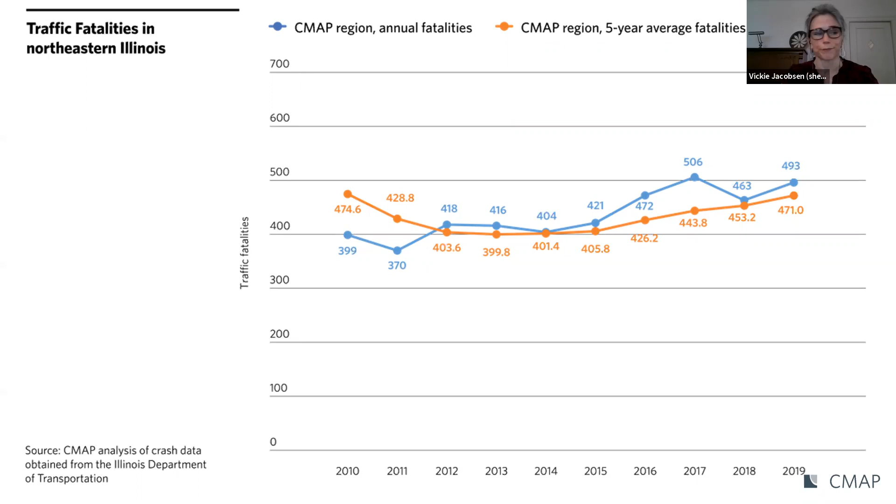In response to these alarming trends, CMAP has recently started a safety action agenda, which is a multi-year effort to develop research and programs that will help make our region safer for all types of travelers, but especially for bicyclists and pedestrians, who are sometimes called vulnerable modes, meaning they are not protected by a vehicle shell, and they are highly vulnerable to traffic safety risks, especially how fast cars are driving.

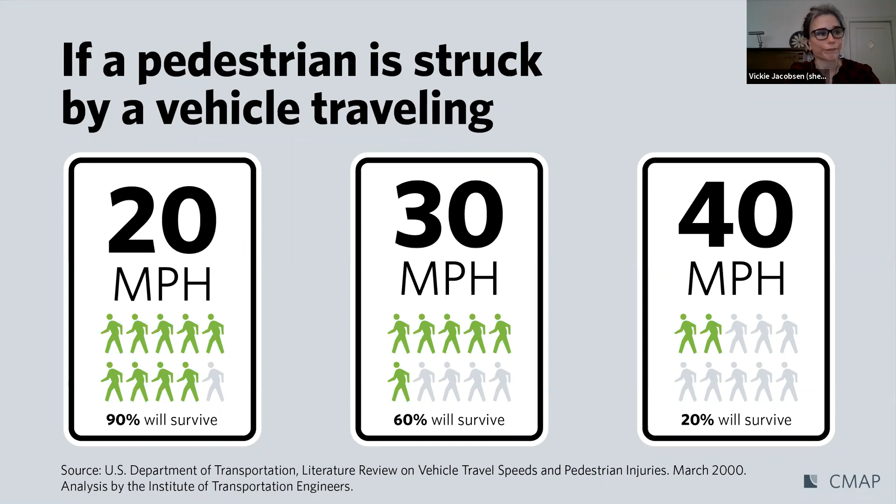As CMAP starts to think about traffic safety, there are a lot of dimensions to consider. You can see them all listed here on this graphic. These are referred to as the E's of transportation safety. You can see how broad and complex safety is. We hope to get into many of these topics in future CMAP Talks events, but today we're focusing on engineering, or design. That refers to ways in which our infrastructure and features of our street look and function to support safety.

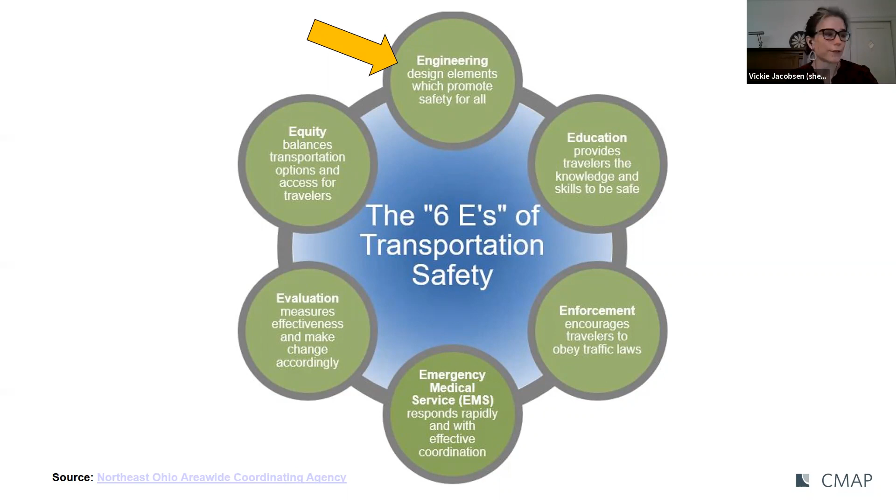Which brings us to our topic today: complete streets. Complete streets is a transportation policy and design approach that requires streets to be planned, designed, operated, and maintained to enable safe, convenient, and comfortable travel and access for all anticipated roadway users, regardless of their age, abilities, or mode of travel. This is a significant shift in paradigm from traditional traffic planning and engineering principles that focus primarily on moving as many vehicles as possible, as fast as possible, without congestion.

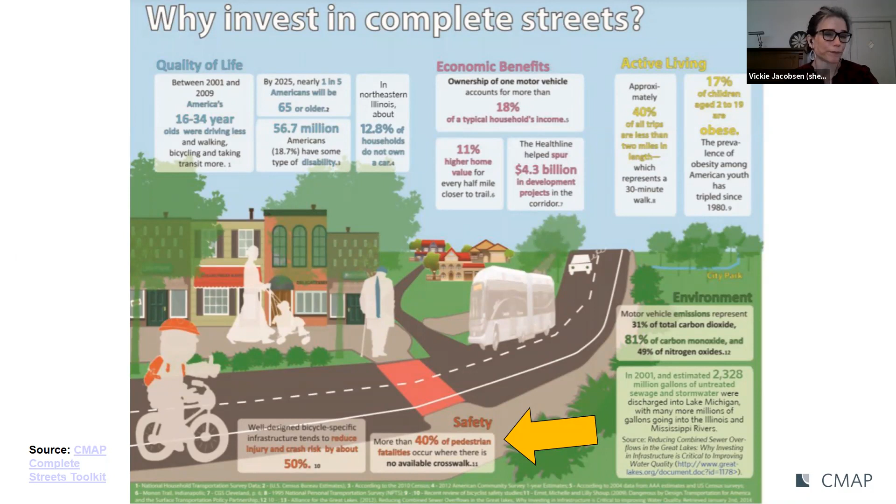Complete streets improve safety by supporting desired behaviors, like providing convenient and clear crosswalks to support predictable crossings, by providing accommodation for bicycles that reduce conflicts with vehicles, and by creating a roadway with what we refer to as visual friction that can signal to drivers that they should slow down.

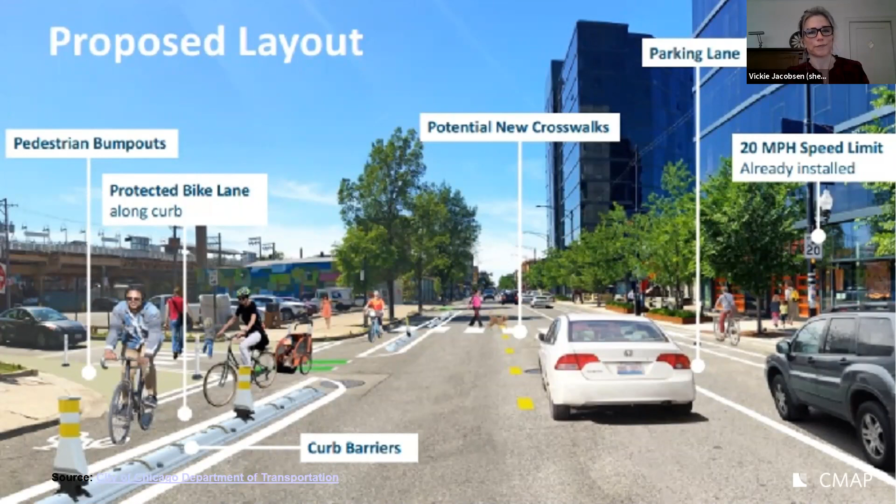Indeed, you will drive much differently on a street that looks like this, versus a street that looks like this, which has been built with very little thought for pedestrian and bicycle movement and supports higher speeds.

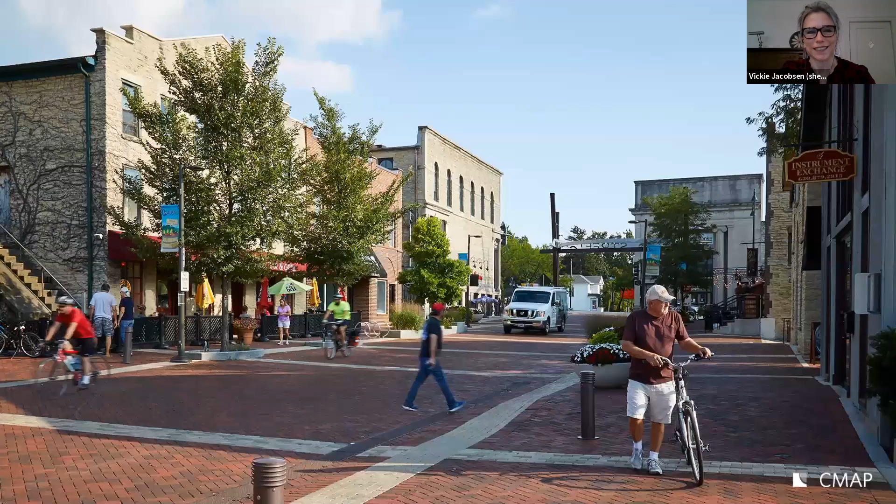You'll drive much differently on a street like this that prioritizes movement in downtown areas, for example, by pedestrians and bicyclists, than you would drive on a street that looks like this, which has again been built for speed and efficiency of vehicles. When streets are designed well, they support and encourage desired behaviors, which can reduce the need for enforcement activities to ensure safety.

So with that introduction to complete streets, I'm happy to pass things over to Tim Gustafson with Epstein.

Well, thank you, Vickie, and good morning, everybody. It's great to be here, and I was asked... I see a lot of familiar names in the attendees list, so I'm excited to present here. When I was asked to present, I was excited because the conversation surrounding complete streets has definitely taken on a lot of new energy regarding what we have the ability to do.

So what I'd like to do is focus today on my presentation about the design of complete streets and all of the host of things that come along with it. One of the things you may have experienced in being part of conversations for complete streets is not just the plan, but wanting to get the project in. There's also a whole host of things that happen around and during this process that I think are really important. Some of these things don't need to get lost in the cracks, and they don't need to fall apart between phases of a project's implementation.

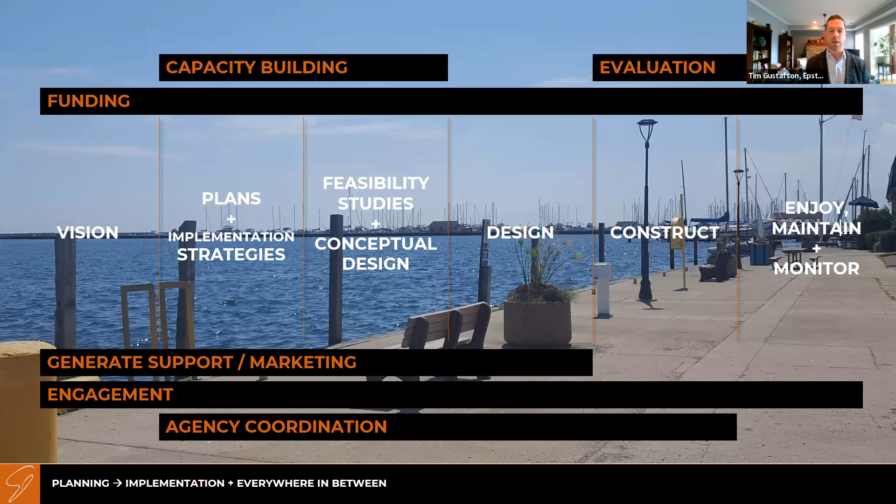I wanted to show this - I have to admit, I thought my favorite color was green, but as evidence on this screen, apparently that's not true when assembling reports. When it comes to implementing complete streets, there is actually no one size fits all.

Going from left to right, I wanted to start first by talking about the Lake Calumet Trail feasibility study, which is just wrapping up. There's a need for connecting facilities east and west of the Illinois International Port District, and one of the best ways through there is actually through the use of a trail. Working with the city of Chicago, the Port District, and IDOT, we identified connections that needed to be made so that the southeast side neighborhoods in Chicago have access to and across Lake Calumet. This draws in access from people on the southeast side that don't have a direct connection without having to cross the Bishop Ford.

So these are really important connections that need to be made, and this was just the first step in a long process of conversation. If you think about that continuum I mentioned, the vision had been there for a long time, but stakeholders needed to know how would that actually happen - how would this connection be made, what might it look like, and how much would something like that cost? Those are all important questions you may not get out of a complete streets plan, but there's always this next step needed so that people understand what they're getting themselves into in terms of a project, and to inspire people about what might be possible.

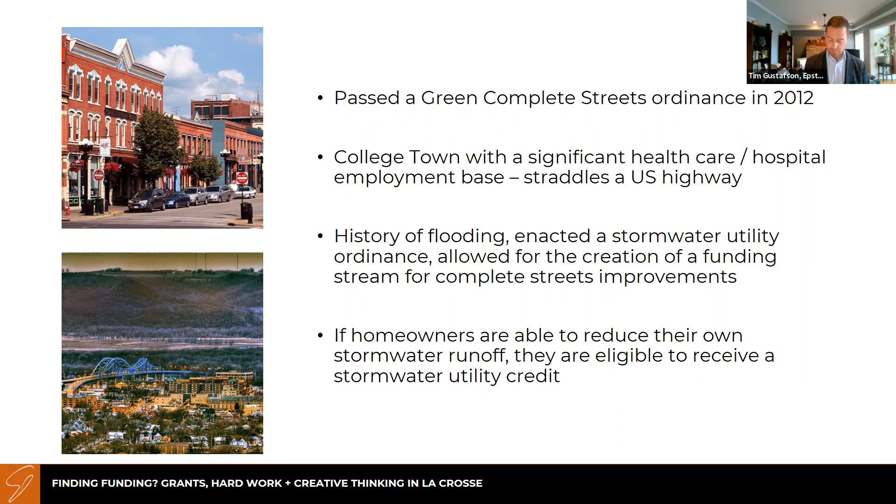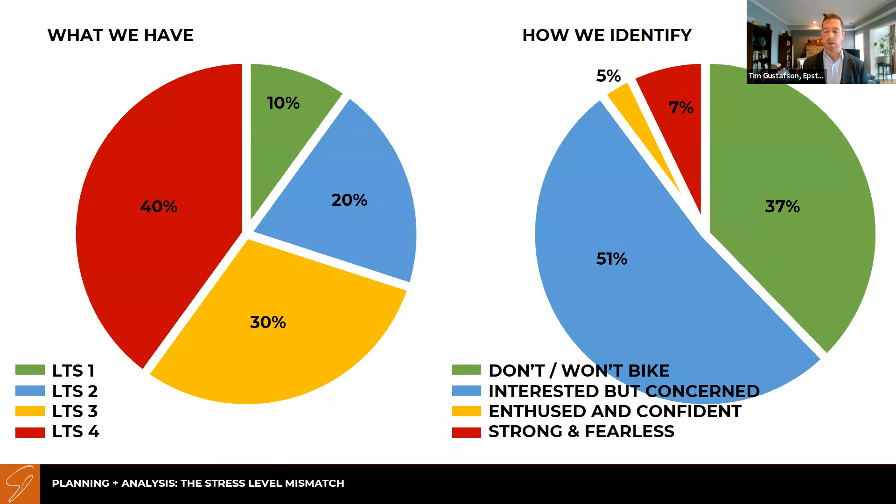Contrast that with the pie chart on the right: when asking people how they identify as a prospective or actual bicyclist, about a third of the population doesn't even get on a bicycle, so stress level isn't even relevant for them. Only 7% identify as strong and fearless bicyclists who'd ride in the city. So 40% of Decatur's roadways are super stressful, yet they'd only be ridden by about 7% of the prospective bicycling population—clearly a mismatch between what we have and how people identify.

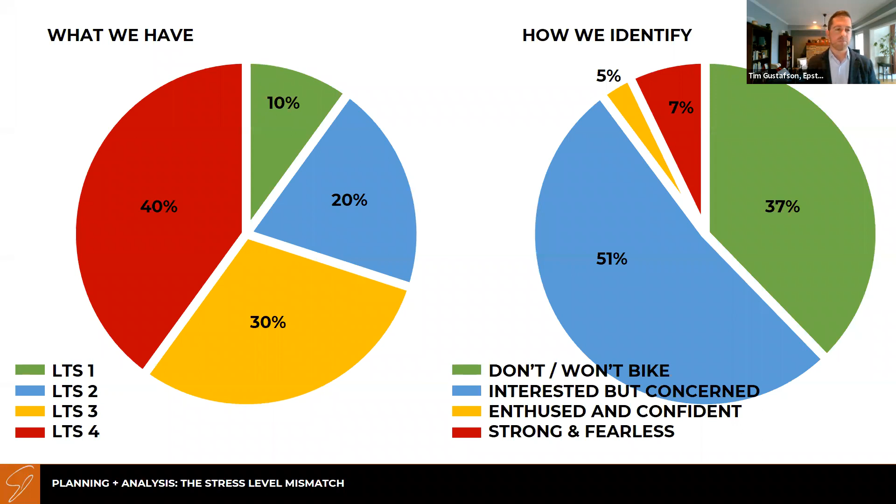This was the Warrenville example I touched on earlier. It's interesting because they have a complete streets ordinance, and we were asked to help craft it. But as part of that, they also needed technical assistance because they wanted to make the case to City Council: this is all well and good, but how much is embracing complete streets going to cost us? That's a question we field a lot, and it's very important to ask.

But the Public Works Director had a very clever way of addressing this. He said, I'd like to take a look at our entire network and analyze whether it has sidewalks or side paths, whether we have jurisdiction over it, and what it would take to actually retrofit our system to provide all the sidewalks we need and implement side paths where our trails plan calls for them.

So this is a very high level exercise. I'll get into more detail on the Northbrook example in a bit, but they wanted to make the case that we're going to embrace this and want to make sure we have funding set aside. After identifying what the overall cost would be—it was more about process than the specific numbers.

Then the Public Works Director began the process of setting aside the ability to provide local match when DuPage County, the Forest Preserve, the Tollway, or IDOT comes to us, so we can participate in building out these complete streets. But he didn't want to have to go back to City Council for every independent action. So by having the ability to implement complete streets, this improved overall city operations and efficiency.

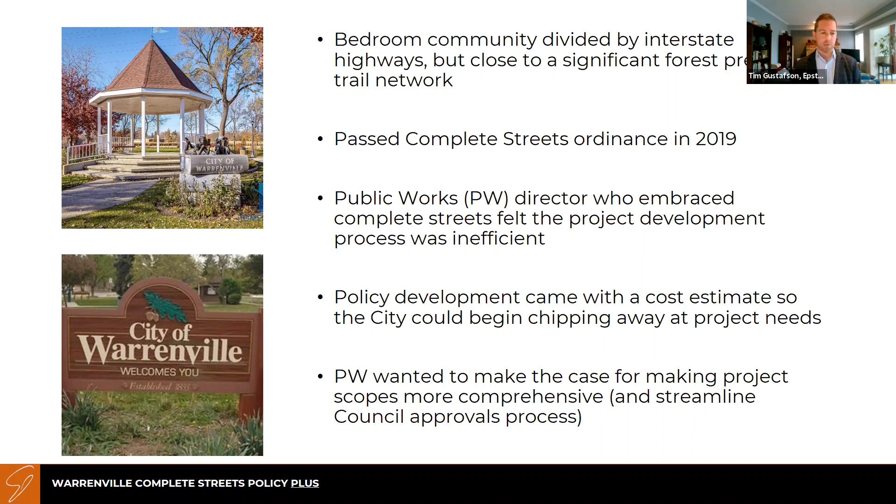Now Carlos is going to get into design a little bit more, and some of you may have seen me give presentations on design, so I don't want to spend too much time on it. But the general idea, like I said at the top of the call, is I don't want you to feel like you don't get to have opinions on design just because you're not doing the actual design work.

In some of my design trainings, I walk people through this idea: you've got an idea—who's in charge of governing that design? There's a whole bunch of design guidelines out there, and they tend to be a little dizzying given how many exist. But as long as you know how to navigate those, you can find out whether the idea you have is allowed, and if so, in what context. That helps you determine if it can be constructed and is feasible.

Once you get to that level on your decision tree, you look around to find out who's doing it best—that's where some of the design guidelines come in, and where you'll see a lot coming out of Complete Streets Design Innovations. The image on the right is from the Northern Lakeshore Trail Connectivity Plan, which asks: I like the idea of putting something in, but is it really appropriate for the speed or volume of traffic on this roadway?

And we wanted to come up with an option to give you just that really high level comfort of saying, yeah, this looks like it might be a good fit. And then you can get into that design in more detail.

The image on the left at the bottom of the slide is an example of putting that idea into practice. Sometimes just drawing on an aerial can go a long way. I know that looks far more sophisticated, but sometimes this starts as a sketch on Google Maps. You take it from that point, move it into the next phase, and start refining it. Don't be afraid to do that, because having those ideas and getting that conversation going is really important for getting people on board and embracing that.

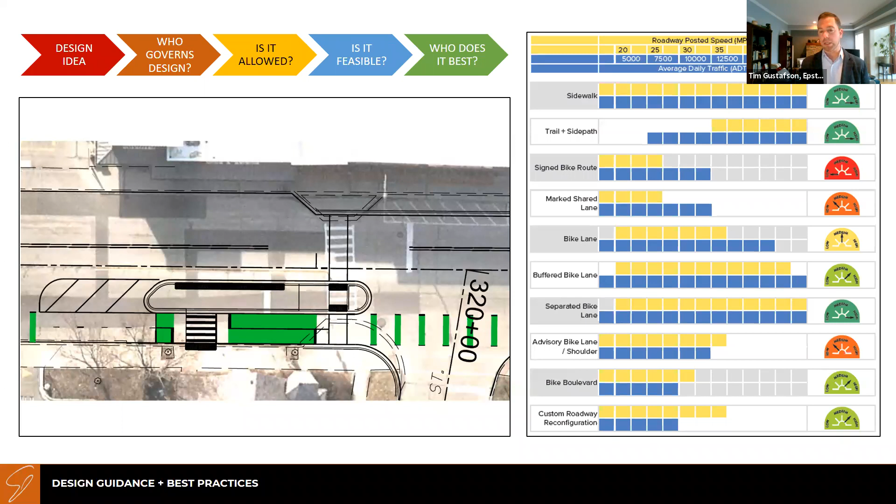So next slide, please.

Now the village of Northbrook was a different situation. When we worked on the bicycle and pedestrian plan, they didn't have a policy yet in place, but they did have a bicycle task force, and they were interested in folding their projects from the bicycle plan into their capital improvement programming process. One thing they did after that was bring someone on who could help them chip away at that plan, task order by task order. This is a great way to say, okay, we have our complete streets policy, we have our multimodal plan, we just need someone to help us get going and build that capacity.

Not every village has full-time staff to do the design and implementation of these. So the village of Northbrook looked at it and said, this is a cost-effective way of getting this going. Epstein is assisting them on a variety of tasks to help them implement complete streets.

And these are really minor. Sometimes it's just using their motor fuel tax funds to do pavement marking improvements. Sometimes they need to put this out to bid for village funded improvements. The image you see here will actually be constructed this month or next, the village's first neighborhood greenway going in. Although I have to admit it's very similar to the shared lane markings they already have on Cherry, this will be going in the Farnswood corridor, not too far from the village's downtown.

So in this example, this is just providing them with really low cost solutions. These don't have to be massive projects, but if you have the ability to bring someone on to do small specialized work, you can start to get momentum and build desire for those larger, more capital intensive projects. So sometimes starting small - I know a lot of people say, well, we can't transform all of our streets, so where do we even start?

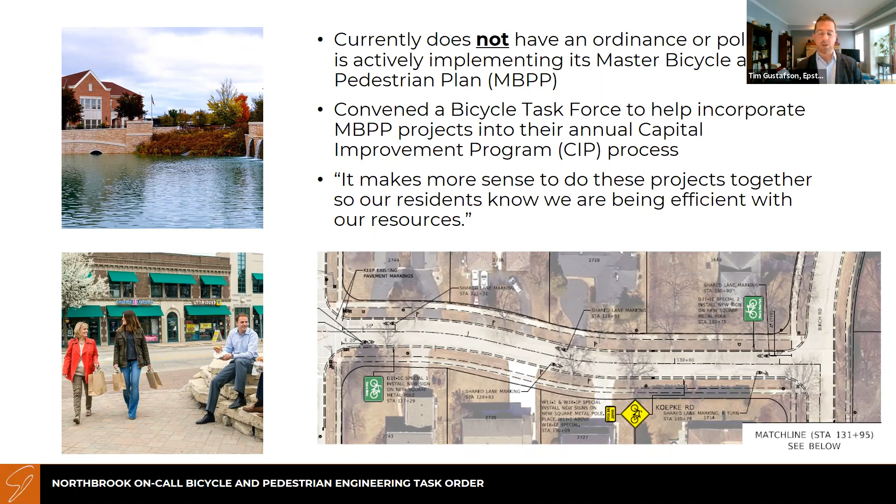I would say start on the streets where you're already seeing it, start on the streets you've identified in your plan, and just do small segments. When people see that it's been implemented, it makes things a little bit better. You really start to build that support and your network starts to fill itself in. That's a good example of chipping away at the design, and you don't necessarily have to do a massive project to do that.

I'll put this in the chat after our discussion today, but there's a website called StreetMix that allows you to drag and drop complete streets elements like building blocks on a page. You don't need to be an expert or a designer, because it tells you how wide these facilities normally are or should be. I even have opinions on how much narrower certain roadway lanes can be. But this is a great tool to just say, I want to put my ideas on the page.

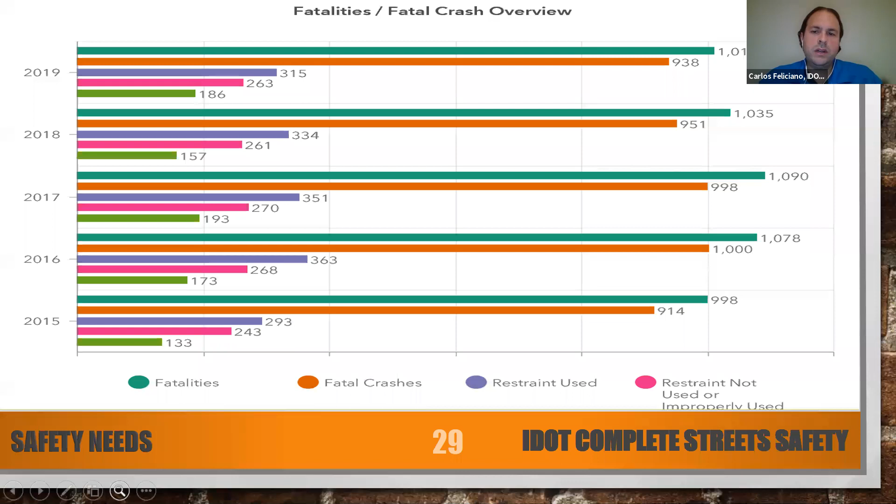All right, so the picture you see right now is the latest trends from IDOT's website as to the number of fatalities in the state of Illinois. You can start seeing that as of 2015, we were hitting below the 1,000 fatality mark, which is a goal we had always had. But you can see that starting 2016, that trend starts to go up. So IDOT invested a lot of resources in the realm of engineering, education, enforcement, and campaigns to try to move the needle of the number of fatalities in the state to go down. And we're heading in the right direction, as you can see in the graph.

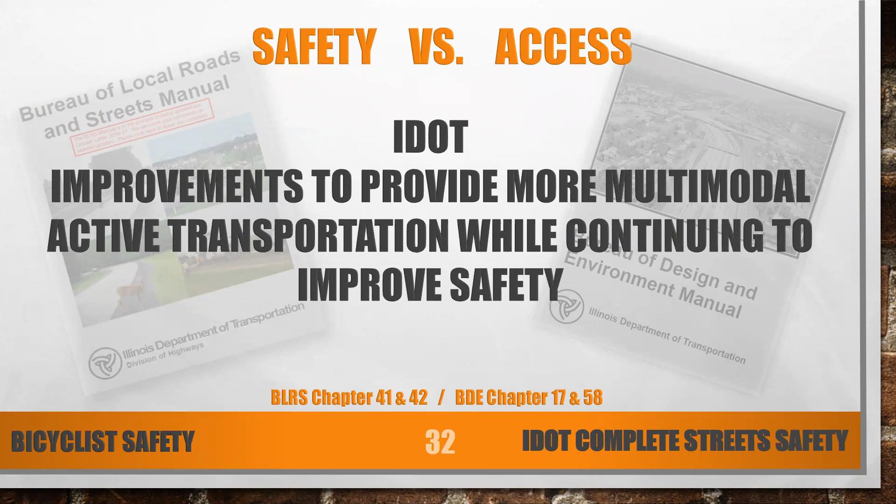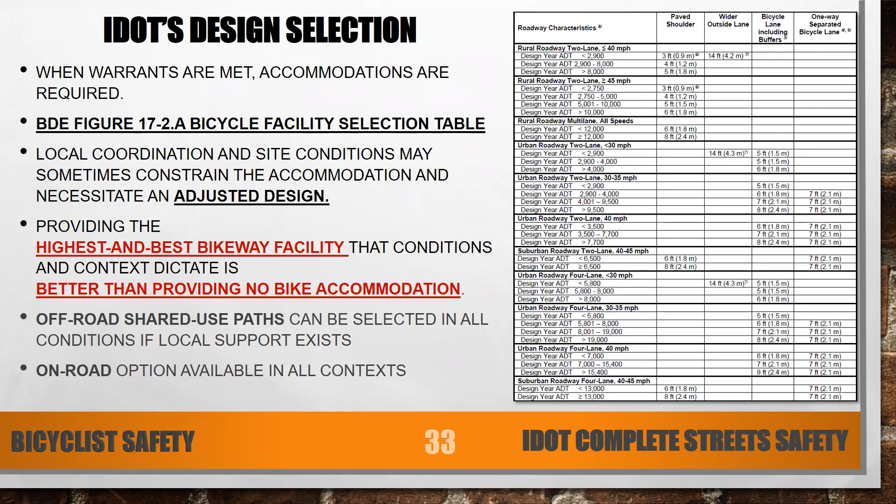All of these accommodations are on-road facilities that are applicable depending on the speeds, context of the roadway, whether it's urban, suburban, or rural, as well as traffic volumes. These are the facilities included on the state system, which are paved shoulders with and without rumble strips. Rumble strips are intended to alert drivers when they're swerving off the roadway.

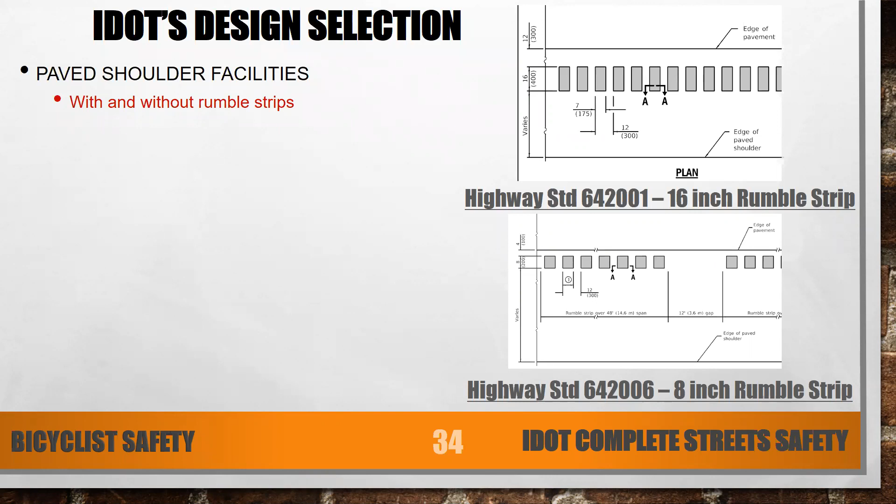They're a proven safety countermeasure for improving safety and reducing fatalities on state highways. In the picture on the right, you can see a facility that, even when we have small shoulders, still provides a bicycle accommodation within that shoulder while maintaining rumble strips. So we have a design that accommodates a 3-foot space for bicyclists to ride on, while at the same time providing vehicular safety.

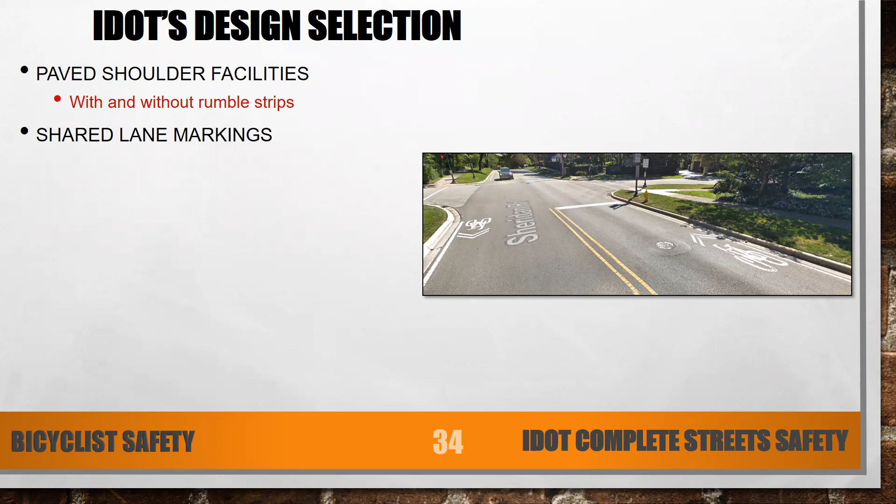Shared lane markings were included after our 2019 update of the Bureau of Design and Environment Manual, for shared lane markings in low-speed urban environments, in accordance with MUTCD guidelines.

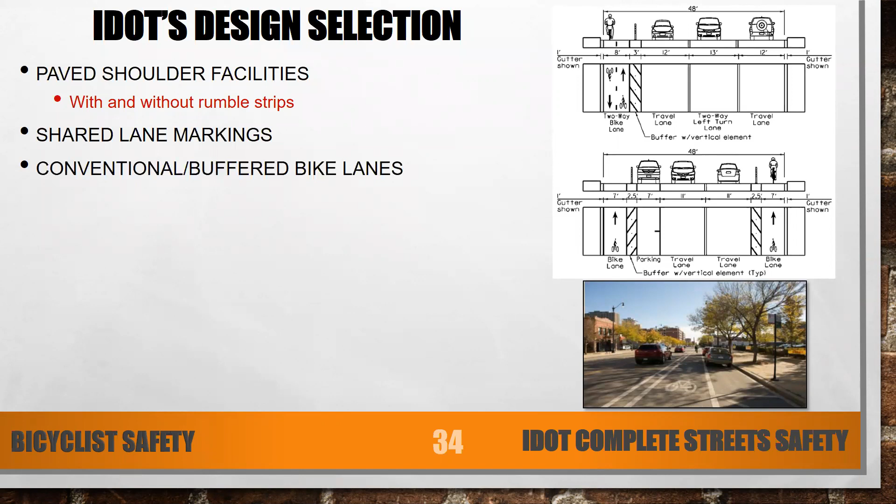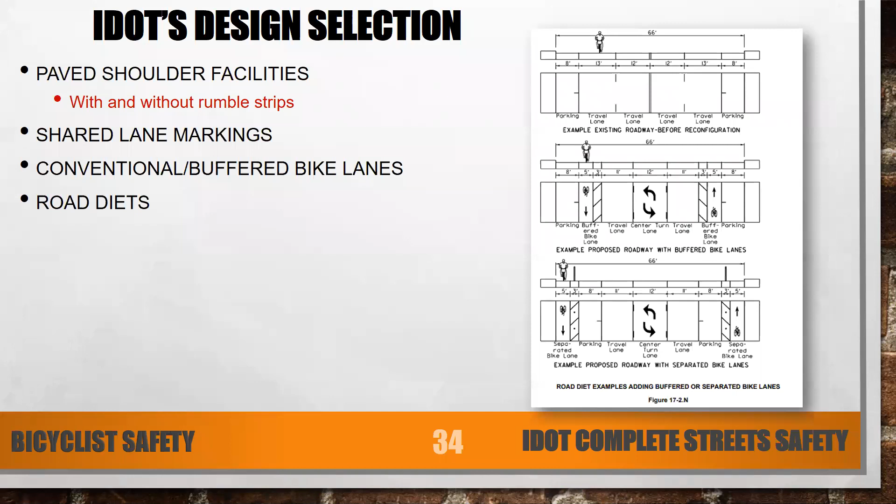Conventional and buffered bike lanes have always been in IDOT's facility design. However, now we have additional improvements to buffers and minimum requirements for buffering, as well as two-way facilities to provide two-way accommodations. Road diets have also been in IDOT's design selection guidelines, but additional information was added in 2019 to provide guidance on how to accommodate bicyclists within these road diets.

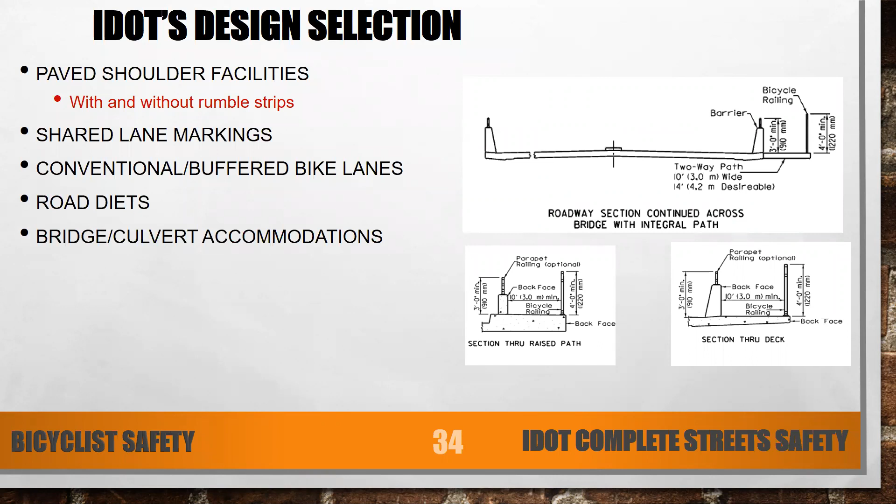Bridge and culvert accommodations - we have numerous bridges, so we provide guidance for the design of these facilities and structures. Separated bike lanes were added in 2019. These are facilities protected from vehicular traffic while still providing an on-road component separate from the pedestrian. Clybourn Avenue is the first installation of a separated bike lane in the city of Chicago, a partnership IDOT had with CDOT. From North to Division, we installed a separated bike lane.

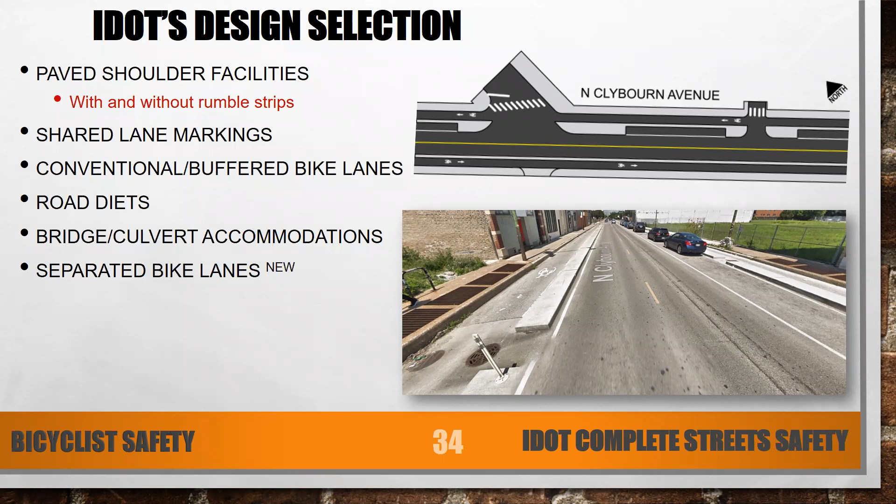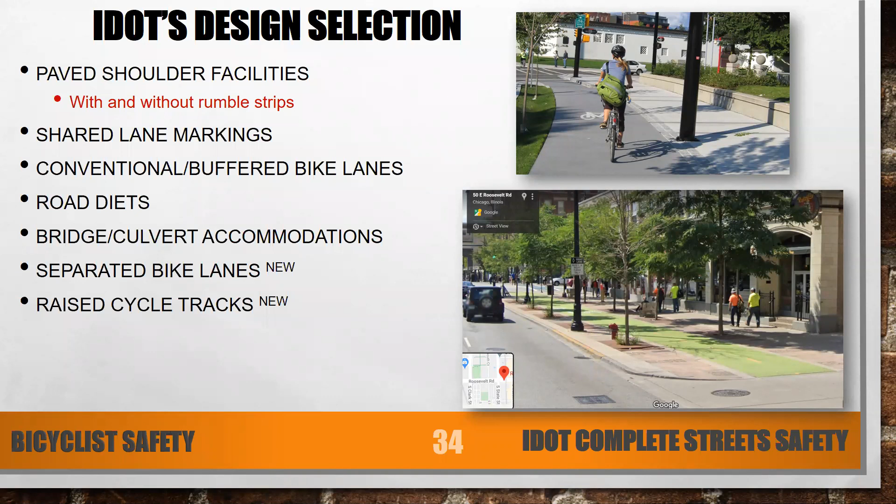Raised cycle tracks - Chapter 17 does not provide design details for how to design these raised cycle track facilities. However, in 2019, we did update the chapter to include these facilities on the state system. There are guides from other states that we're looking at, so I expect that in the future there will be some design guidance added for raised cycle tracks, but they are a component of the system in northeastern Illinois.

Intersection treatments are a big focus of IDOT's implementation strategy for bicyclists, because the majority of fatalities and crashes that happen with bicycles are at intersections. So we provide a robust number of options for bicyclist accommodations at intersections.

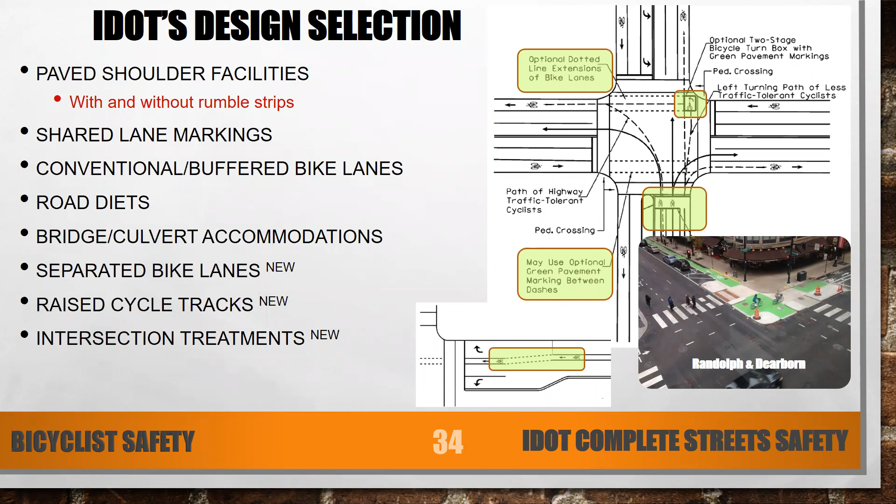And then the last thing that we've added in the 2019 update is bike signals. These are signals intended exclusively for bicyclists when there's conflict with vehicular turning movements.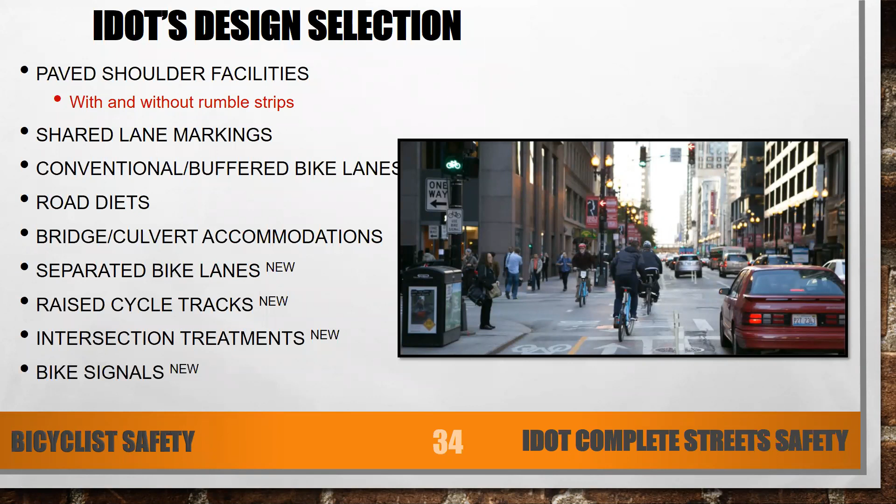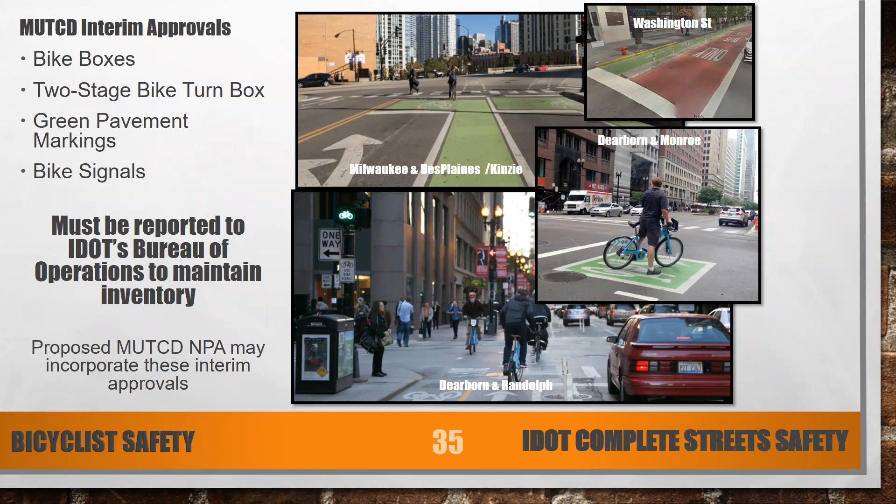4 of these treatments that we added in 2019 are under MUTCD interim approvals, which are bike boxes, turn boxes, green pavement markings, and bike signals. However, there's a notice for proposed amendments going on right now with the MUTCD, so these accommodations are expected to be included in the MUTCD in the near future.

These are the guides that we use to inform our facilities. One of the things we start seeing is that on the cyclist trend, the number of fatalities for cyclists in the state of Illinois is actually going down, which is a trend we want to see and want to continue to see. And as a proportion of fatalities, the number of bicyclist fatalities is pretty low compared to other modes.

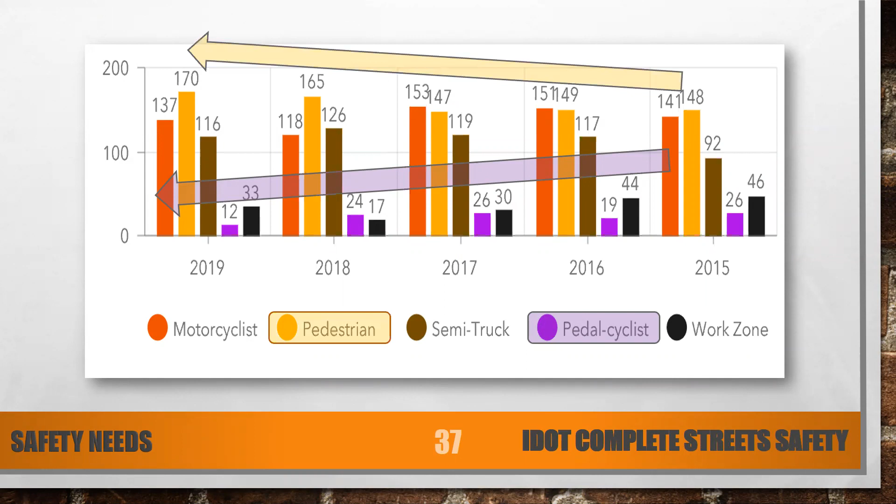One trend of concern is that now we see an increase in pedestrian fatalities. So what is IDOT doing to address pedestrian fatalities? IDOT partnered with the Federal Highway Administration as part of the Every Day Counts federal initiative, which deploys proven, underutilized innovations to improve pedestrian safety. There are different implementation stages, which I'll cover for each strategy we're using.

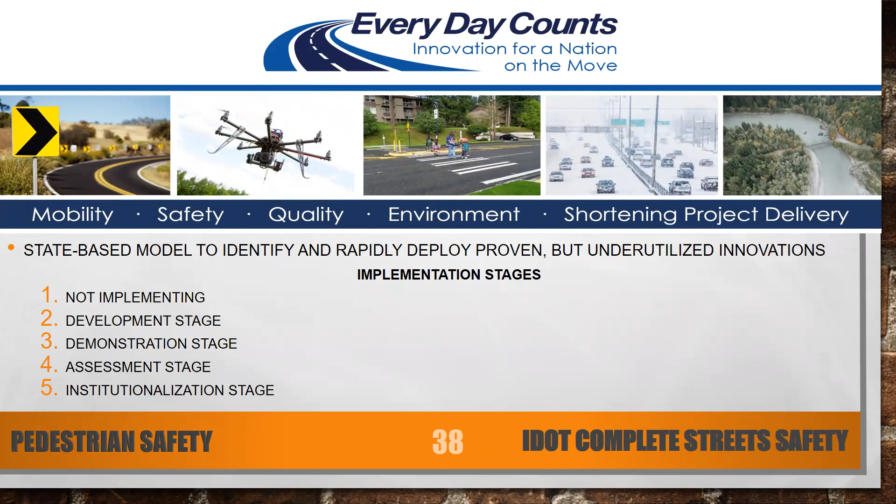So IDOT looked at 7 different alternatives. I don't know why they call it Spectacular 7 - it's like Jon and Kate Plus 8 minus Jon. So we'll go with that.

The first one is leading pedestrian intervals - signal phasing modifications to improve the visibility of pedestrians crossing at an intersection. IDOT is in its demonstration stages here; we do follow the guidelines for implementation, however there are very few locations where LPIs are being implemented.

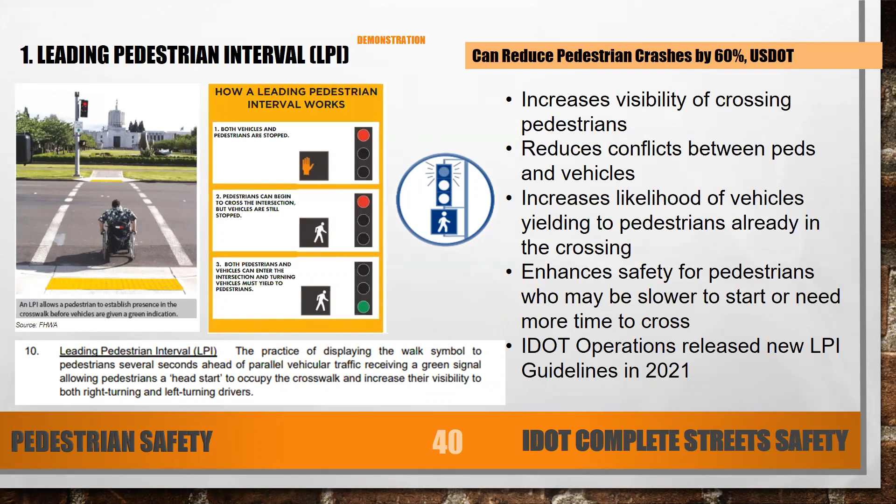This year in 2021, IDOT actually released the new LPI guidelines through our Central Office Operations Bureau to provide guidance to our engineers as to where it's appropriate and what different treatments are needed for provisions for lead pedestrian intervals. The second treatment is crossing visibility enhancement.

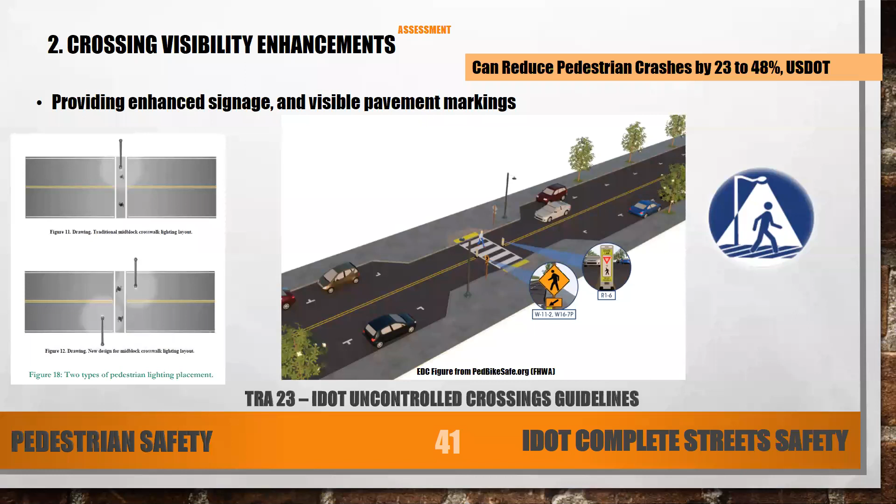Now, in this stage, we are in the assessment stage. IDOT developed uncontrolled crossing guidelines, which provide improved signage as well as pavement markings. Crossing visibility enhancements can reduce pedestrian crashes by 23 to 48%. So those are good numbers to see for these uncontrolled crossings.

This is what the matrix for the uncontrolled crossings guidelines looks like, and it's based on the roadway's traffic volume, speed, the context, the number of lanes, and topography. Currently, we are in the first version of this matrix. Version 2.0 is in draft mode at IDOT, and it should be released pretty soon. Before, IDOT relied just on engineering judgment to help decide whether or not an uncontrolled crossing was warranted and appropriate. Now we're utilizing these guides that help us make informed decisions.

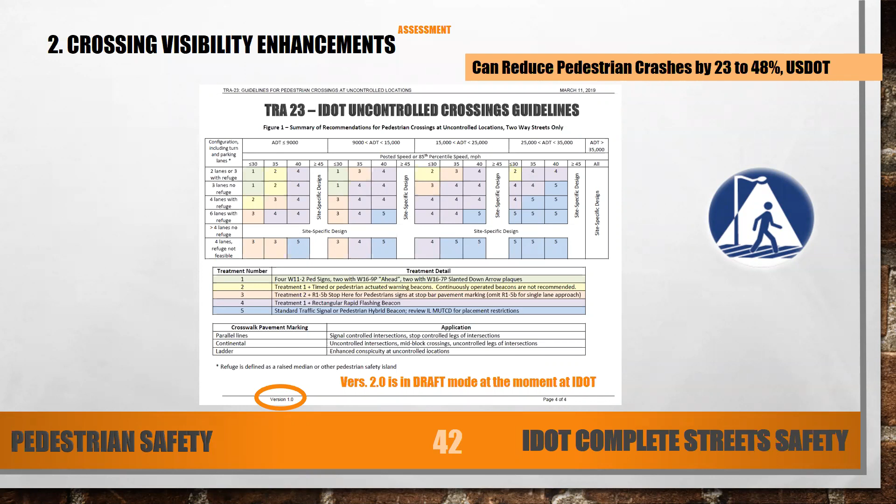The third treatment is rectangular rapid flashing beacons, or RRFBs. Here, IDOT is in the demonstration phase. These can reduce pedestrian crashes by up to 47%, according to the USDOT. Many of you are familiar with RRFBs.

There used to be a moratorium on RRFBs. However, there are no longer any moratoriums on RRFBs at IDOT or on the state highways, but they do have to meet the requirements and appropriateness. Although RRFBs can be installed on 2-lane and multi-lane roadways, the performance on multi-lane roadways needs consideration because they don't perform as well as on 2-lane highways.

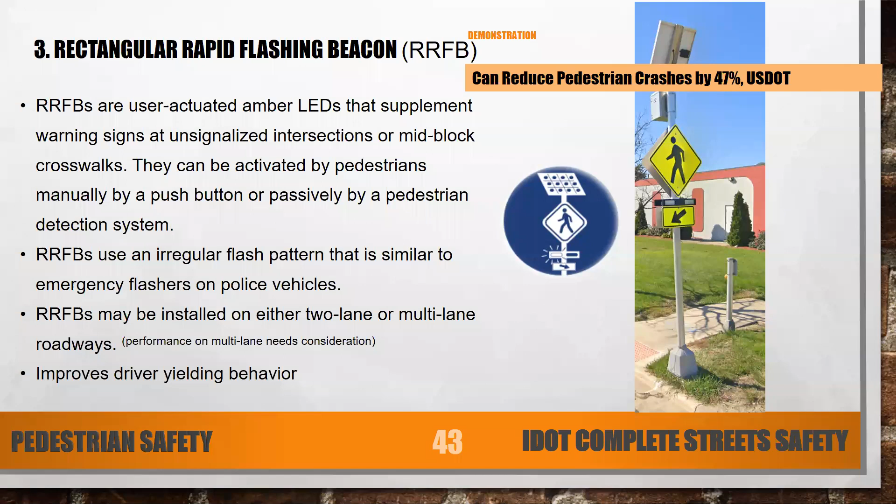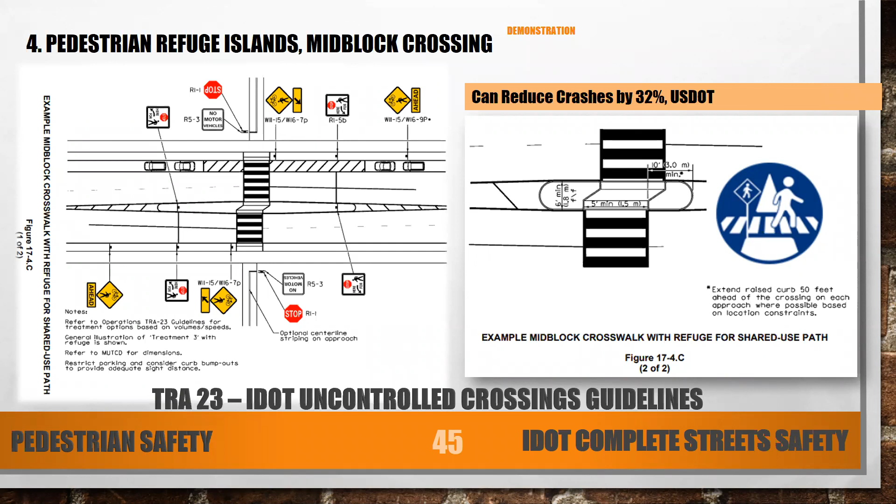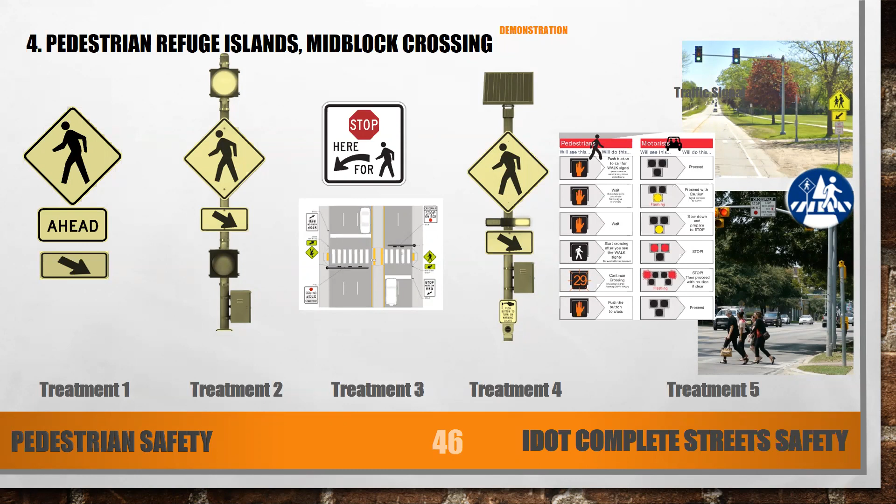The next treatment — this is what the different treatments recommended by the uncontrolled crossings guideline look like. Treatment 1 is just the standard pedestrian crossing signs. Treatment 2 adds the beacons. Treatment 3 adds stop bars and 'stop here for pedestrians crossing the roadway,' which is a law in the state of Illinois. Treatment 4 is the RRFB, and treatment 5 is either a pedestrian traffic signal or a pedestrian hybrid beacon, which I'll get into next.

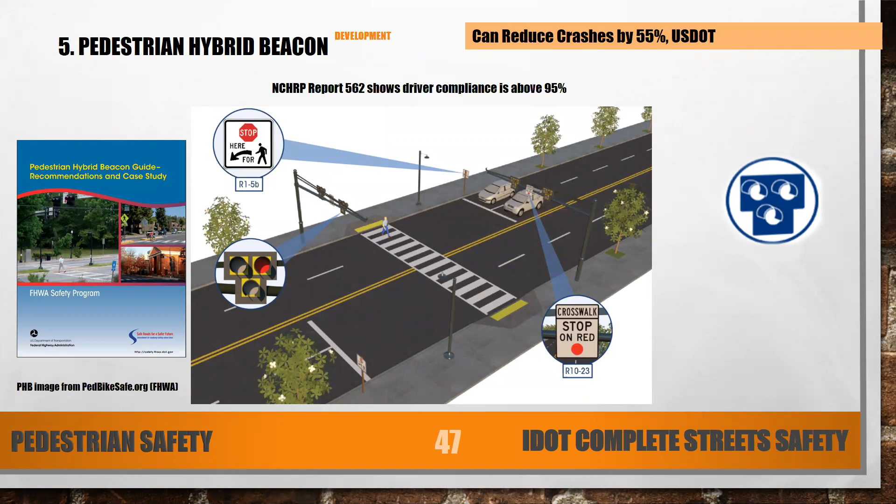Our 5th treatment would be pedestrian hybrid beacons. These are shown to reduce crashes by 55%, and NCHRP Report 562 shows driver compliance above 95%. So IDOT is currently in the development stages for incorporation of pedestrian hybrid beacons, and the reason is because few of the proposed locations where these have been requested meet the actual MUTCD criteria, which is what IDOT uses for the installation of pedestrian hybrid beacons.

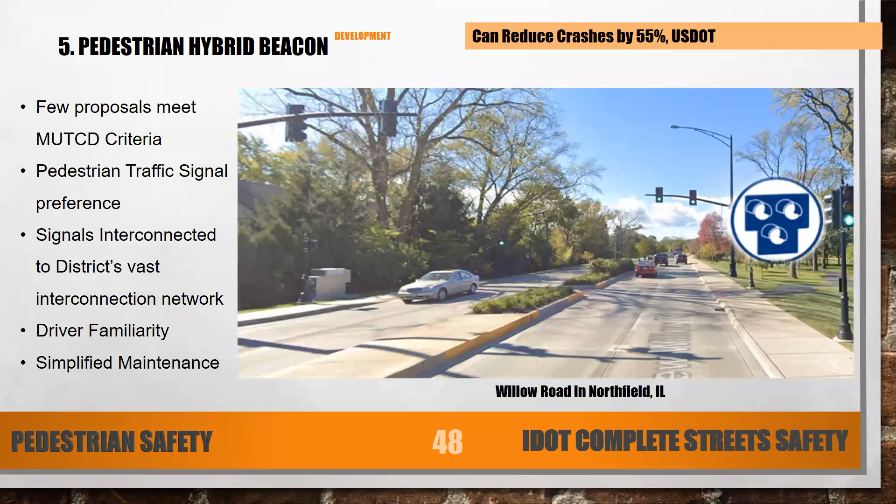As such, the preference for our district in the northeastern Illinois area is for pedestrian traffic signals. The reason is because we have over 3,000 traffic signals in our northeastern Illinois area, in the Chicagoland area, and many of these are actually part of an interconnected system that we can benefit from for improved mobility through our network. They also provide driver familiarity, whereas pedestrian hybrid beacons are fairly new in the state of Illinois. Everybody knows how to use a traffic signal, and everybody knows how to push a button and what their next steps are. They also provide simplified maintenance, so when our signal is down, we're able to repair it and fix it and get people moving as quickly as possible.

The next treatment is road diets. IDOT is in the demonstration phase for these. We have several locations where we have installed or improved roads to have a road diet, which is a reduction in the number of lanes based on reductions in traffic volumes. These are proven to reduce crashes by 19 to 47%.

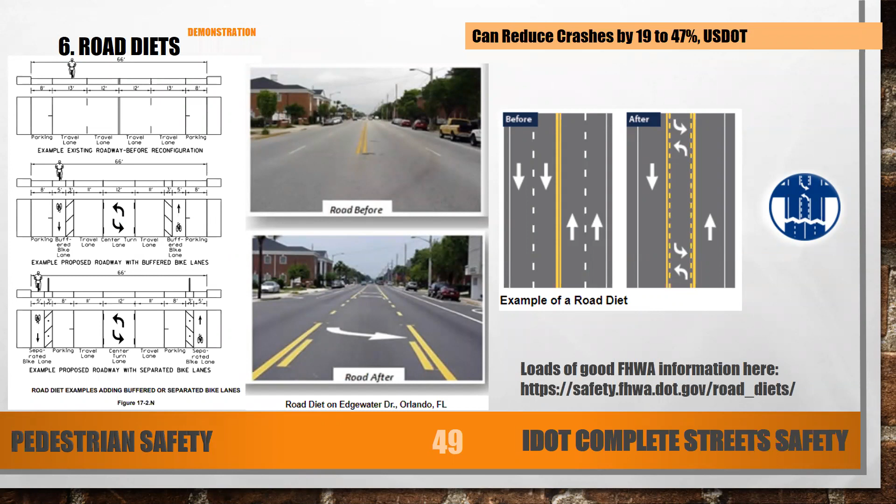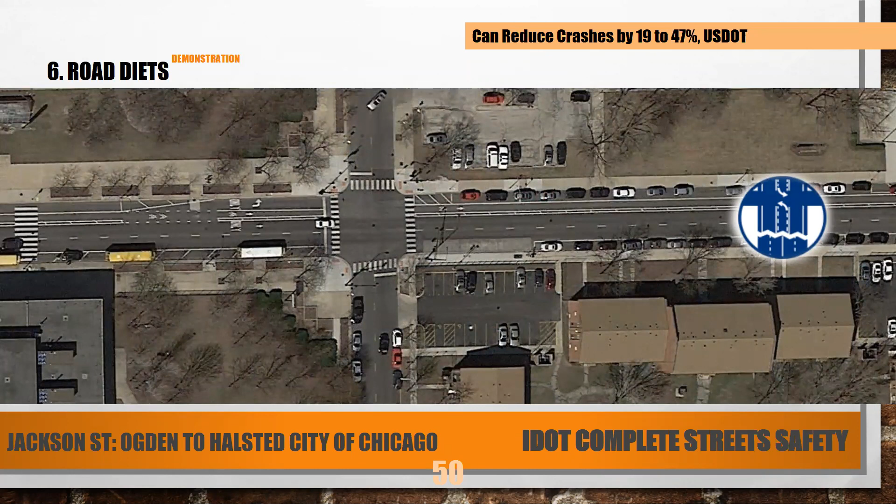Here's an example of a road diet done on Jackson Street between Ogden and Halsted in the city of Chicago. You can see large 3 lanes in a single direction. With road diet improvements, you're able to provide a complete street facility that accommodates parking, bicyclists, as well as a buffered bike lane and room for vehicles to access their destinations. The next example is in Geneva.

Road diets require project development to be performed. We require an engineering study to ensure we understand the effects to operations and safety of that modification. It has to go through IDOT's project development process, which is a 3-phase approach. Phase 1 is the engineering studies, phase 2 is preparing the contract plans, and phase 3 is the actual construction. These take time, because a lot of engineering analysis has to be done to make sure we're not making things worse by reducing the number of lanes.

It requires coordination with the public. It requires public outreach to make sure people are aware that their commute and daily operations are going to be different.

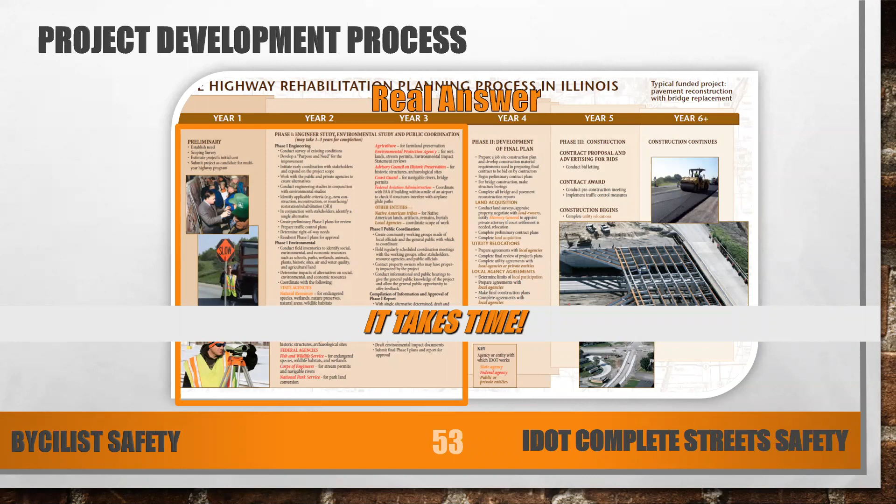The next treatment is raised crosswalks. IDOT evaluated the inclusion of raised crosswalks in the state system and decided not to implement them. These are more appropriate in a local system. They cause issues with snow plowing, a concern especially in northeastern Illinois. You have to pay special attention to drainage to make sure it's draining properly, and special attention on curved roadways.

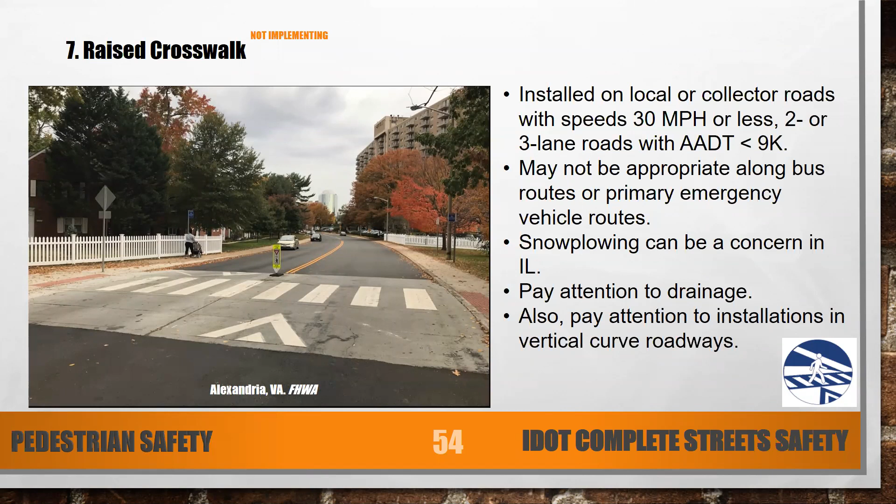The next treatment is the Everyday Counts countermeasure selector. For municipalities struggling with how to reduce pedestrian crashes in their system, there are resources available for you to select a treatment based on your context, if you're not using IDOT's uncontrolled crossings guide.

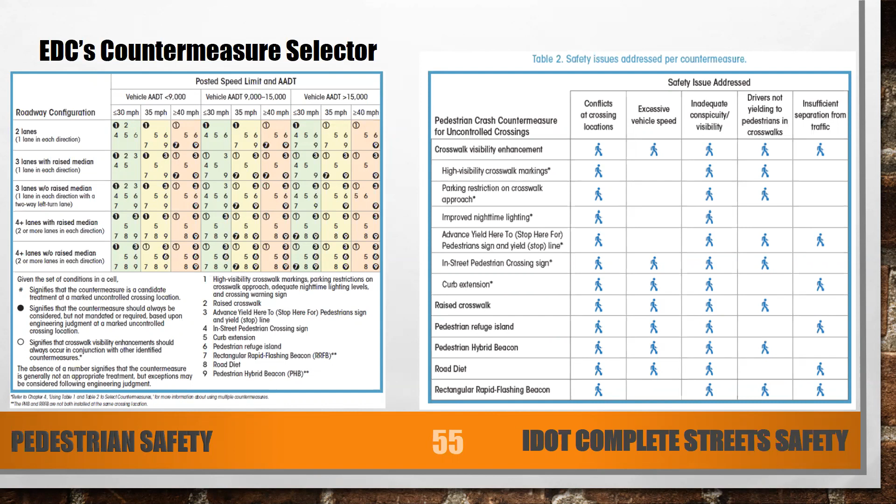Engineering is not the only solution. As Vicky pointed out, there are 6 different E's in the equation for improved safety, and education has to be part of it. This graph shows compliance with occupant restraint, meaning seatbelts. You can see that with education and enforcement, you can significantly increase the compliance rate for seatbelt usage.

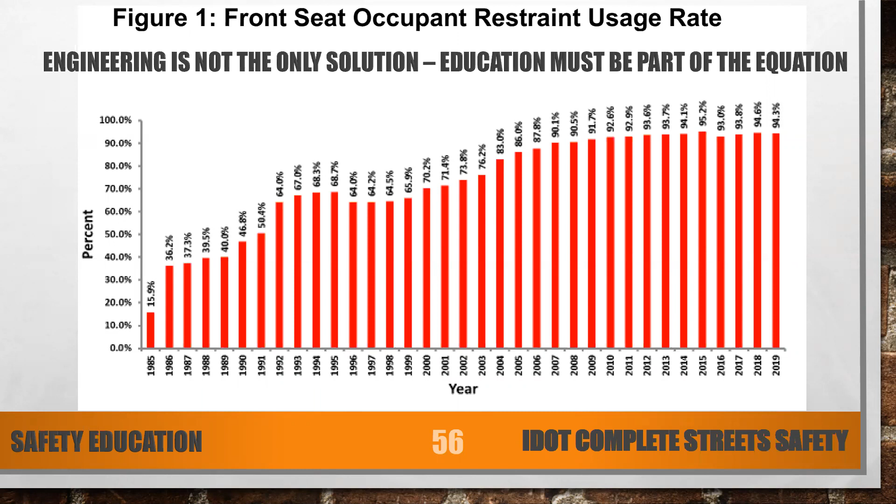Right now the state of Illinois is up to 94% compliance. Those trends started in 2001, the same year the number of fatalities in vehicles started to go down. So there is a correlation between the two.

There are numerous campaigns that IDOT has. Bicycle and pedestrian safety is a component of our safety campaigns, but there's also seatbelt usage, motorcycles, wearing your helmets for motorcycles, as well as work zone awareness, because we've been seeing an increase in work zone fatalities. It's concerning. Next week is actually National Work Zone Awareness Week.

Education has to be a component for each municipality to educate their citizenry on how to properly use these facilities. Having a safety action plan, having a pedestrian plan, is always beneficial, so you're not always being reactive. You can be more proactive about improving safety within your local system.

There are numerous resources available for you. The Federal Highways has a really good website for pedestrian and bicycle safety as part of their Safe Transportation for Every Pedestrian program, or the STEP program.

Lastly, I wanted to give a nod to our bicycle and pedestrian accommodation study. For all of these facilities we're talking about, as well as others not included in IDOT's bicycle facility designs, IDOT prepared this study that examines different bicycle and pedestrian facilities and how they affect operations, maintenance, and safety.

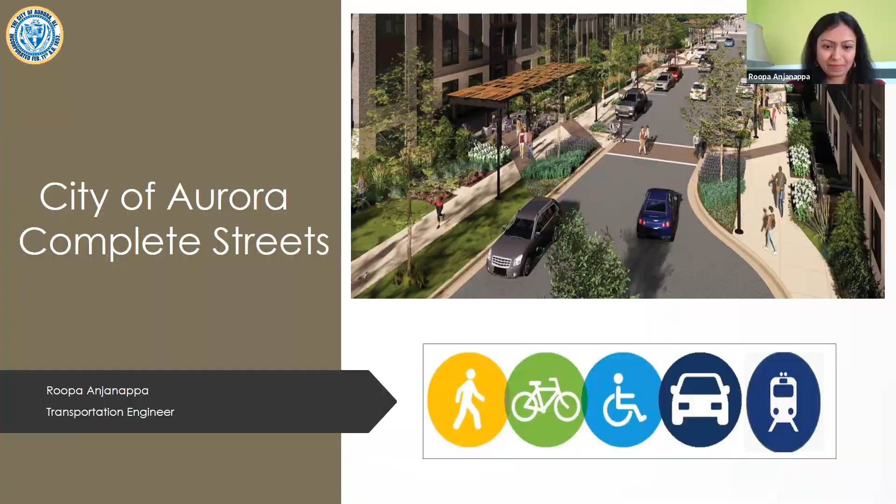City of Aurora adopted its Complete Streets policy in December 2020, with a vision to create a reliable, livable, safe, and accessible, well-connected surface transportation network for all users, including people of all ages and abilities. The city had been implementing some complete streets principles into its planning, scoping, design, and construction even before adopting the policy. However, adopting the policy ensures these principles are incorporated into all appropriate plans, manuals, and programs across various relevant city departments.

The city plans to measure performance by keeping track of the pedestrian, transit, and ADA accommodations we are making, including bicycle facilities, both on-street and off-street, on a yearly basis or so.

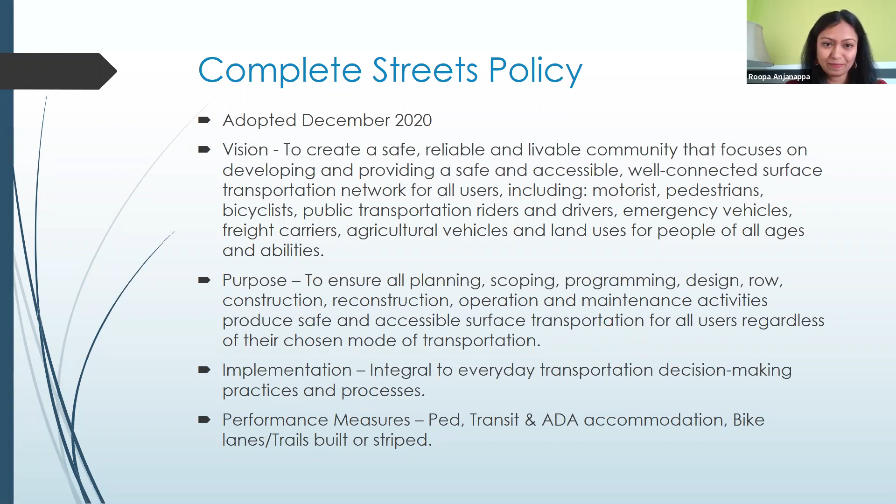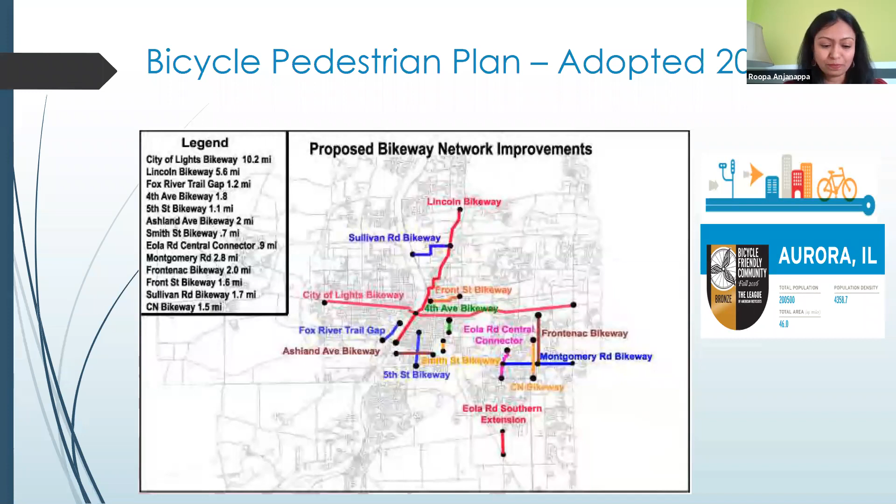Having a bicycle pedestrian plan is integral to the principles of complete streets. The plan recognizes areas and aspects within the existing roadway network to encourage alternative modes of transport to motor vehicles. There are proposed bikeway network improvements throughout the city. Some of these projects have been completed while others are still in the planning stage. The city is also recognized as a bicycle-friendly community at the bronze level by the League of American Bicyclists, with that recognition coming back in 2016. We are up for renewal and hoping for silver status, but continuing with bronze level status would also be good. This adds continued value to all the work being done to encourage alternative modes of transportation.

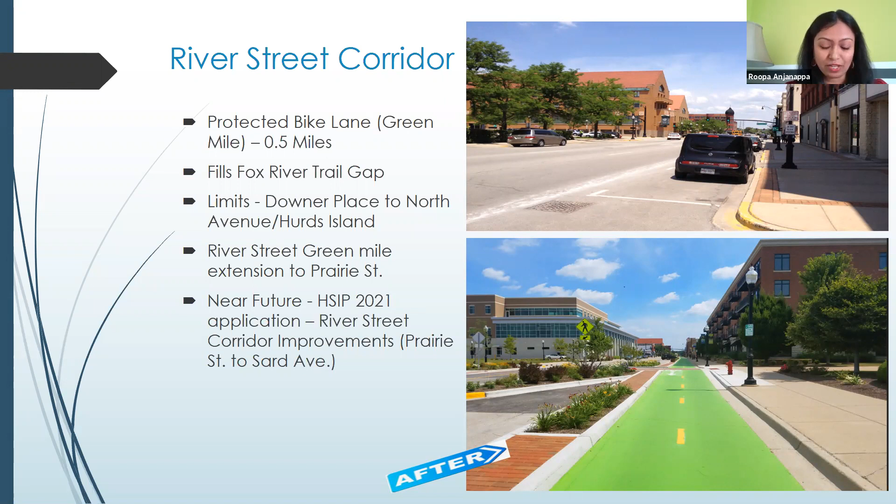River Street corridor improvements that we did back in 2015 are a great example showcasing how a street can serve all road users. The street was under state jurisdiction and part of a one-way coupling. The city took over jurisdiction from the state and converted River Street to a two-way street, adding a protected bike lane on the south side that runs about half a mile between Downer Place and North Avenue. The two-way protected bike lane fills the decade-or-so-long Fox River Trail gap, providing a continuous ride for bicyclists. The protected bike lane was extended as part of another project up to Prairie Street. We are hoping to improve the rest of the corridor through another project being prepared for a 2021 HSIP grant.

Farnsworth Avenue - we are excited about improving this segment. The project secured HSIP funding in 2019 and is currently under phase 1 engineering. The intersection is recognized as top 5% critical in the IDOT safety tier and has seen 2 fatal crashes in the past 5 to 10 years. There were safety concerns at both the Illinois Prairie Path crossing and the Marshall Boulevard crossing. To address these, we are adding pedestrian refuge islands, rectangular rapid flashing beacons, advanced warning signs, resurfacing this whole segment and restriping, and limiting the parking lot entry at the Illinois Prairie Path crossing to right-in and right-out only. This should help grab motorists' attention to pedestrians and bicyclists attempting to cross the road.

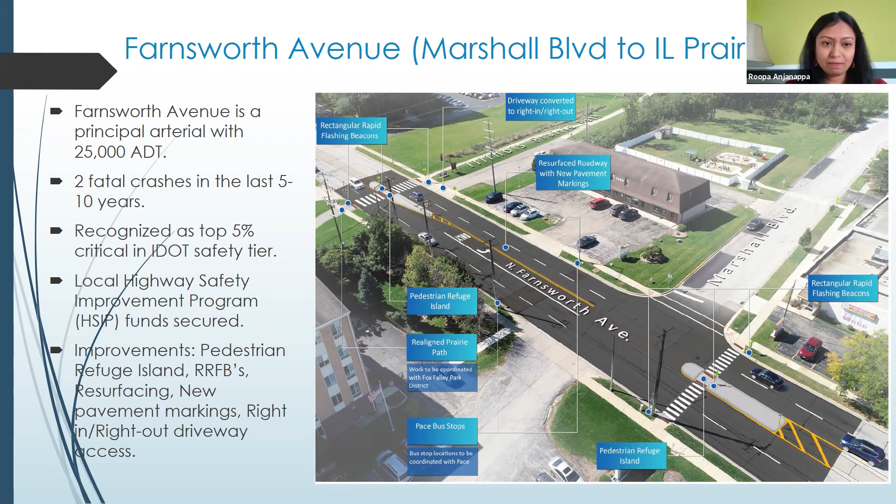Indian Trail Corridor has secured two types of funding: HSIP funding for the Indian at High Street intersection, and STP local funding for the rest of the corridor. Safety concerns were raised in crossing Indian Trail at High Street, where the Illinois Prairie Path meets. We are addressing these concerns by proposing a new traffic signal at the Indian and High Street intersection, widening the roads of the corridor from 4 lanes to 5 lanes to bring conformity and provide additional capacity via intersection channelization. We are also extending the bike path on the north side to meet Mitchell and Church for better connectivity and safe crossing.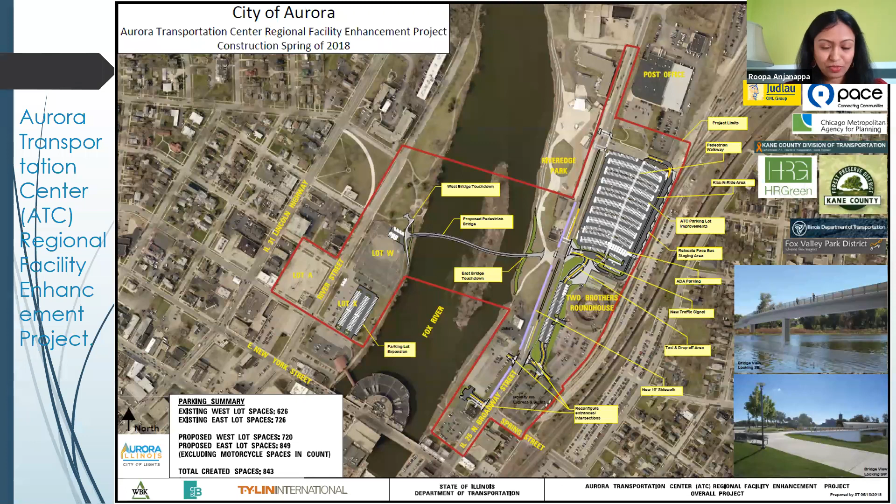We are hoping to open the bridge to the public sometime around the end of May, but that's tentative depending on the weather. There is still some amount of work that needs to be done, but we are really excited about this project. Next slide, please.

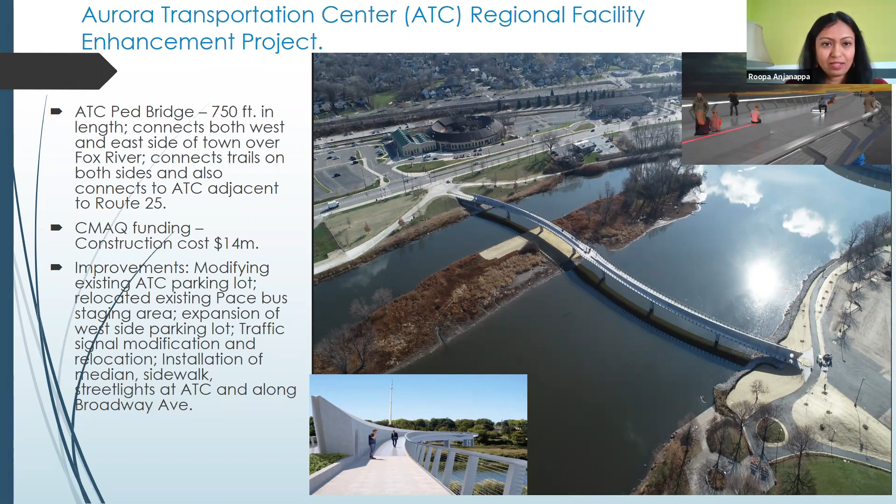Last but not least, we are addressing safety concerns and making immediate improvements through our citywide resurfacing and sidewalk programs. When the list is prepared for the resurfacing or sidewalk program, it will be shared with the Bicycle Pedestrian Transit Advisory members for their valuable input, which is incorporated into construction, provided they fall within the program criteria.

The sidewalk program is resident complaint driven and basically fixes damaged sidewalks and also looks at making ADA improvements. All of these improvements would definitely add safety and probably provide better accessibility as well.

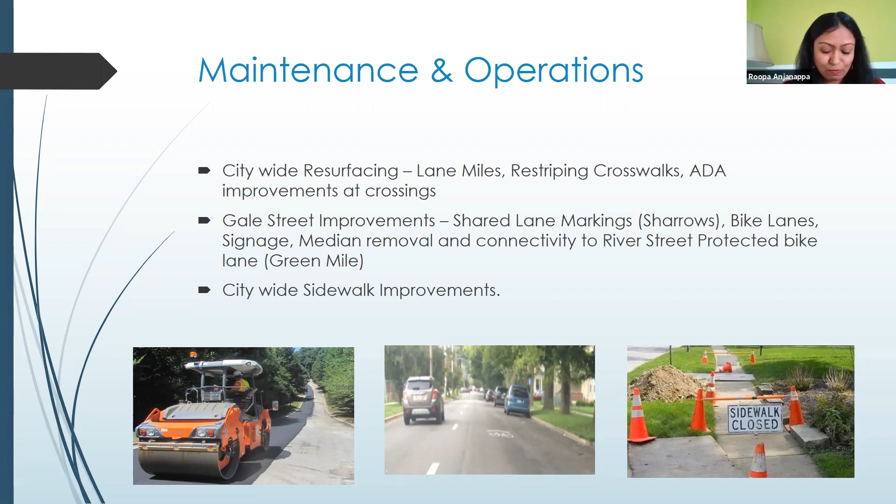This concludes my presentation, and thank you for your time. With this, I hand it over to Vicky.